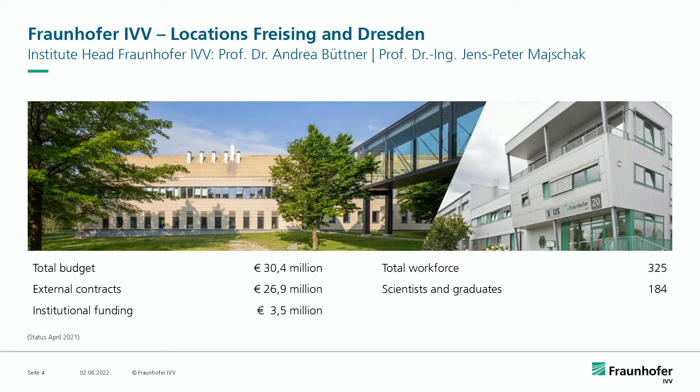We have a budget of 30.4 million euros, and you can see that the large part of that is gained via external contracts, with a small share of public funding. The two locations combined have 325 employees, among whom there are 184 scholars and graduates.

So how do we collaborate with industry? On the one hand, we work together with industry in publicly funded projects through joint research applications, although the industry does its share in the form of funding. Publicly funded projects are usually published, so the results are publicized.

We also have bilateral projects directly with the industry, so you cooperate directly with Fraunhofer Institut. The advantage of that is that the project results are not published, so they remain between the research and the industry in question. So we carry out joint projects with the industry.

So what do we do in Freising and Dresden? Our main area of activity is food, where we look at high quality, the promotion of healthy products and ingredients. Another large field is packaging.

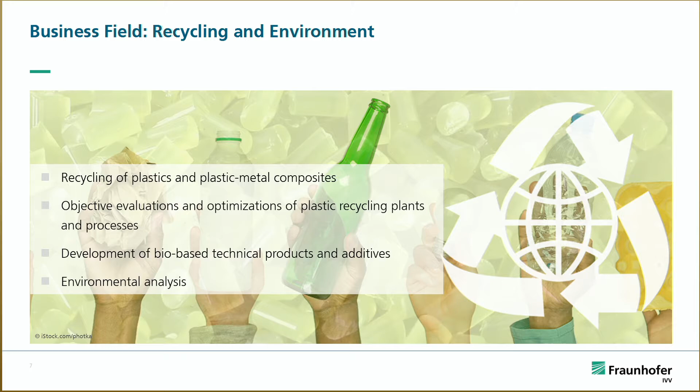We recycle plastics and plastic metal composites. We evaluate plastic recycling plants and processes, and we develop sustainable products and additives. Of course, we also carry out environmental analysis.

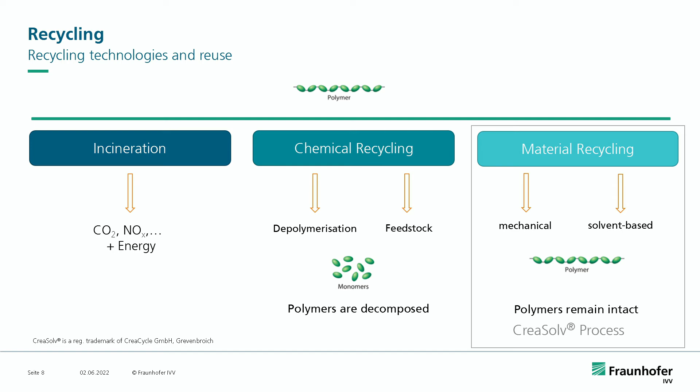I quickly summarized the options you have in recycling technologies and reuse. You can see the intact polymer chain at the top. The difference between recycling technologies is, on the one hand, incineration, which is what we want to avoid. This can restore energy, and there are two methods.

One is chemical recycling, where you break up this long chain, which was painstakingly created, and decompose it. The advantage is that you get the quality of a new product, because it's broken down into monomers, so it can be cleaned very effectively.

The opposite of that is material recycling. This can be done mechanically or thermomechanically, using various sorting techniques and compounding, and recombine it into a polymer chain. Or there's another approach - even though it contains the word 'solvent', it's solvent-based, it is actually also a material process. I'll get back into that later.

So the difference between chemical and material recycling is what I just said: in material recycling, the polymer chain remains intact, and in chemical recycling, it's broken down into monomers.

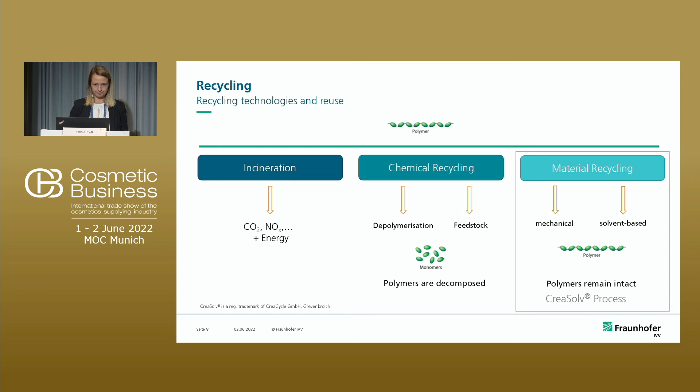So much for the preliminaries. In the recycling business field at the IVV, we deal both with polymers and polymer metal composites. We develop and license solvent-based processes - this is our CreaSolv process.

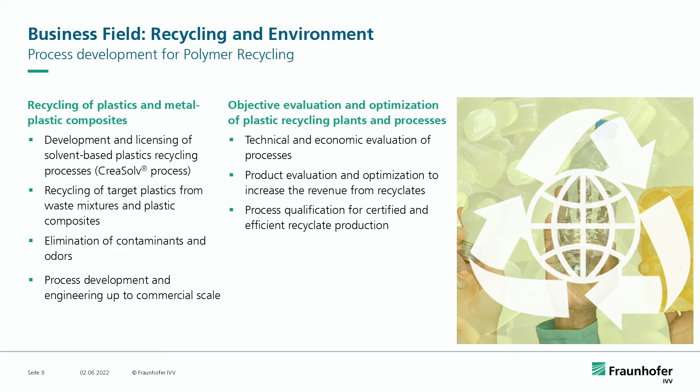Some of you may have heard of it already. We focus the recycling on the target plastics of waste mixtures and plastic composites.

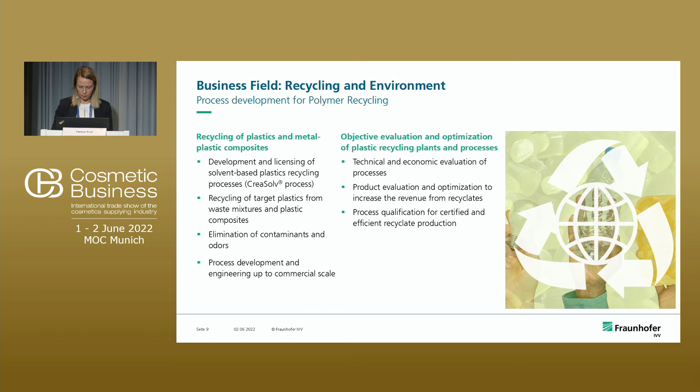So what we focus on is the reduction of contaminants and odors. Moreover, we carry out process development and engineering up to a commercial scale. Something else that we do is technical and economic evaluation of these processes, and we're trying to bring it to market together with the industry.

By now, there are 3 working groups within this department. Back when I started, there were just 6 of us 10 years ago. Now there's 30 of us. So, of course, due to inquiries, we've really grown, and the field of research has grown too.

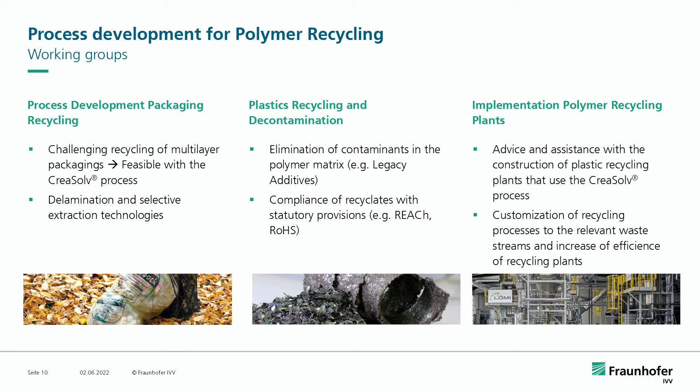I'm group head of the process development packaging recycling. So I'm looking into the recycling of multi-layer packagings within the CreaSolv process, but we also develop further the thermomechanical recycling processes. So we're not just using the CreaSolv process as such, but we also work out techniques for delamination and extraction.

Then there is another group focusing more on technical plastics, and they are looking to extract additives out of the processes. So construction waste would be one example. In the past, there were additives used that are by now prohibited, and we can use our technology to sequester those.

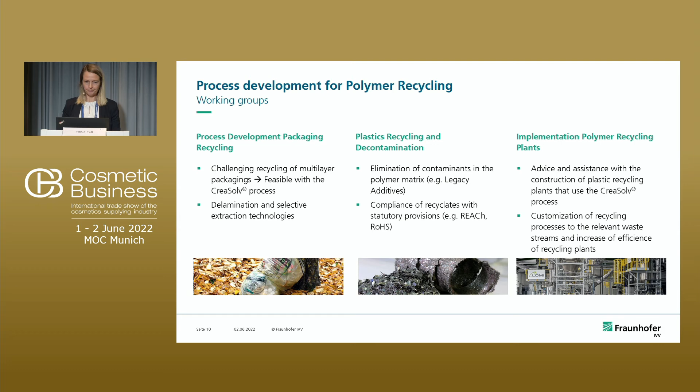Another group is us not just working in the lab, but we're also industrializing our processes. So we're supporting the industry and accompanying this process to the point where it's industry ready and the industry can take over management.

So let's talk about today's topic, which is probably why you're here in the first place: recycling for cosmetic packaging. As an example, I just brought this diagram. This is best practice. This is PET bottles. So we're handling this pretty well.

So for PET bottles, there are collection systems. You all know that. You return your bottles to the supermarket, and then they are cleaned, and this is introduced in a separate cycle, and they can then be reprocessed into new bottles. So this circulation, this cycle, makes sure there are very few contaminants, and it makes it possible that you get an EFSA or FDA petition.

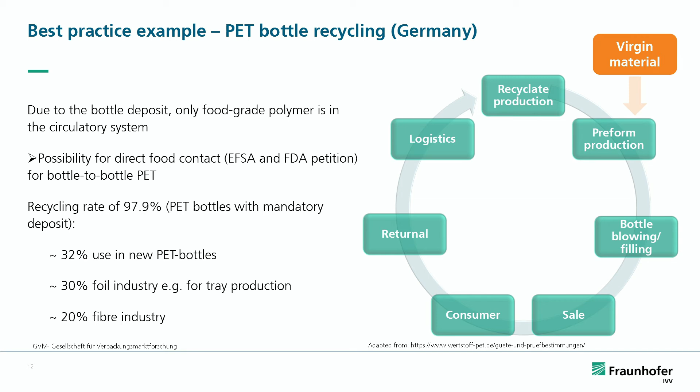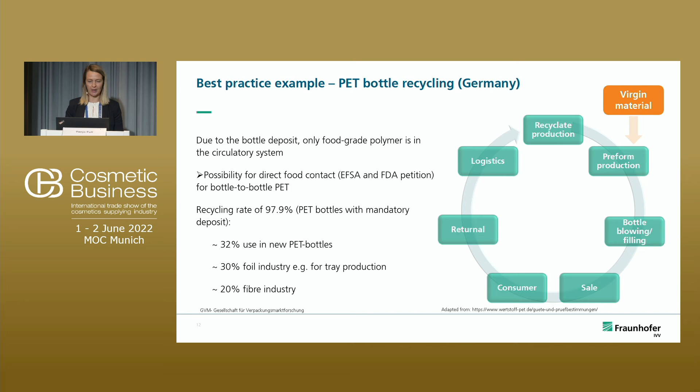So, where do these PET bottles end up? Only 32%, unfortunately, are used to produce new PET bottles. 30% end up in foil or tray production, and 20% end up in the fiber industry. Why do I say unfortunately? Well, actually, it is a pretty good waste stream, and it would be very suitable to close that gap, PET bottle to PET bottle. That would actually be the way to go.

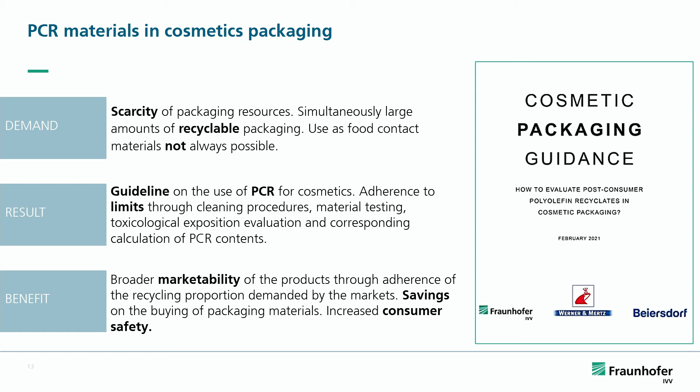Okay, let's get to what I brought you. One of our projects, which we've carried out currently or in the past, is PCR material, post-consumer recycled, whether we can use this in cosmetics products. So the demand is actually always there. We need packaging that does not damage the environment, and ideally they should be food safe. And so we were asking ourselves, what can we do to remarket these?

Dr. Frank Weller, my colleague, you may have heard of him, worked together with Werner & Merz and Beiersdorf to work out a cosmetic packaging guidance, which is a public document. You just need to check the internet and can review the study. So I'll get into more detail on the next slide. But the goal or the benefit was to use this guideline to make it possible to get back to the right way of application. So this is a short overview.

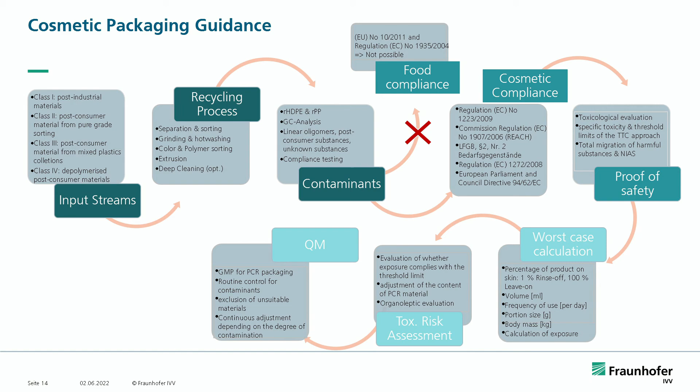So just imagine the yellow bag or the yellow bin, or if you're not from Europe, all packaging waste just bunched together in one big bin. And class 4, that's material which is introduced or is generated via chemical recycling.

So then you have all the possible recycling processes. You have thermomechanical recycling with its various steps. Through all these various packagings, there's a variety of contaminants that may be there. I'll get back to that later to explain the difference in a bit more detail. The fact is that from these materials that I've just mentioned, no food compliance can be generated.

So Mr. Weller got together with industry partners to figure out how to get to a cosmetics guideline. Mr. Weller is usually asked whether he can rate and assess these recyclates, and then he'll play through scenarios which will get him to a conclusion about the safety of the product.

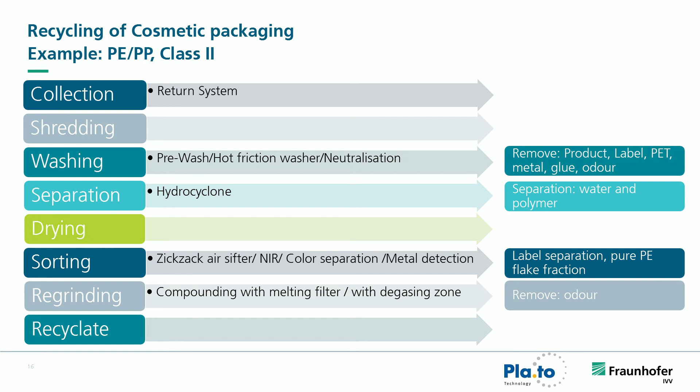So how would we do that? As I just told you, grade 2 means you introduced your internal return system, as was the case with the PET bottles here in Germany, which need to be shredded and washed. Normally you need a pre-wash because product residue may remain in the bottle, and you want to save as much water as possible, so you'd use dry cleaning processes followed by friction washing. The purpose is to remove all labels and glue residue and remove any odors that may have developed. Normally you use a sodium-based detergent, as is also typical for PET bottle recycling processes.

After completing the washing process, you can also recover polyolefins. You can separate that off PET because polyolefins will float on the surface while PET trickles down, so you can do that kind of separation too. To separate water and polymer, you run it through a hydrocyclone before drying it, then through a zigzag air sifter to remove any labels. We use NIR to do additional sorting, for example if you want to separate PP.

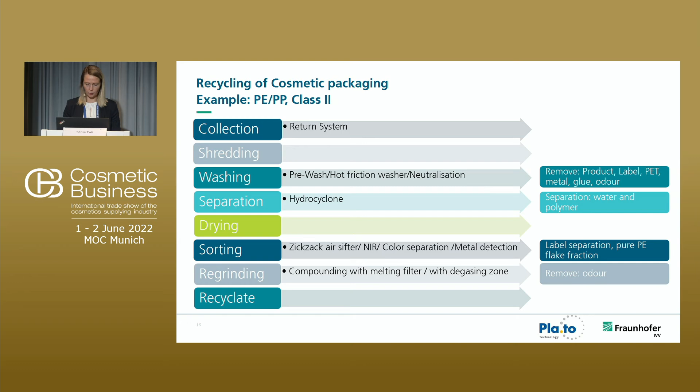Another option is color separation using IR technology and camera systems, followed by a metal detection process, strongly recommended to protect your extrusion facility, which is the last step. After sorting and cleaning all materials, you do compounding with melting filters, and to eliminate other odors you use a degassing zone. After completing this process, you end up with a high quality recyclate, which you can then return into the material circle.

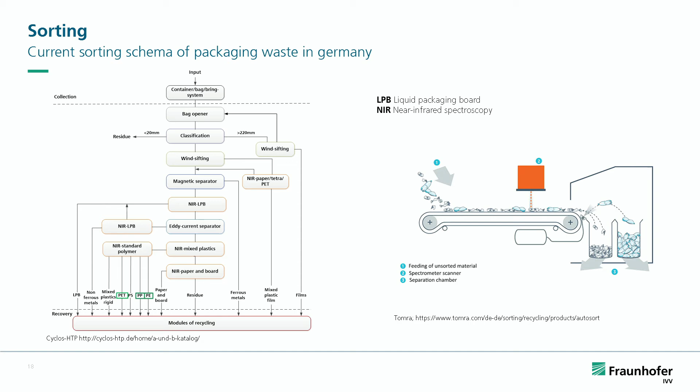After collecting all those recyclables, how can we actually extract our recyclates? Here in Germany, it's a take-and-bring system, meaning consumers collect all their waste materials and either drop it into the yellow bin, the yellow bag, or take it to recycling sites. It depends on where you live, in which region or community, and how they want to do it. You either have to drop it off, or it will be collected from your home and then passed on to a sorting facility.

Once it arrives at the facility, they open up the yellow bags. Next, it's classified as larger than A4 size or smaller than A4 size. Larger films are automatically separated and removed from the rest using the size classification system, then cleaned, then put into the film fraction site — that's the 310 fraction, for those familiar with the principle. Then it's fed back into the loop and run through the classification process again, followed by a windsifting step which helps remove smaller films from rigid materials or other packaging materials.

As you can see, it's like a mixed layer fraction here — mixed plastic films that can either be used as such, or you could also use NIR technology to do additional sorting. Next, you remove LPBs, which run through a magnetic separator. Here we have the first NIR scanner, where we extract different polymers like PET, PS, PP, PE, and all other fractions not recognized during the previous steps of the process.

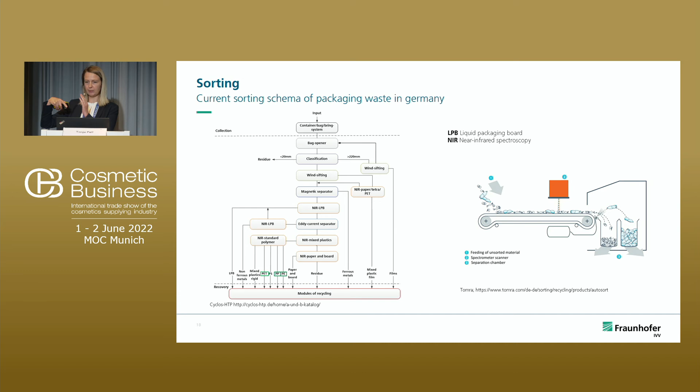You have to separate it very well and spread it out across the belt in order to allow the NIR scanner to really recognize individual components on the conveyor belt. Because if the NIR unit recognizes PE, for example, an airstream will be applied to actually shoot it off to the place where it's supposed to go.

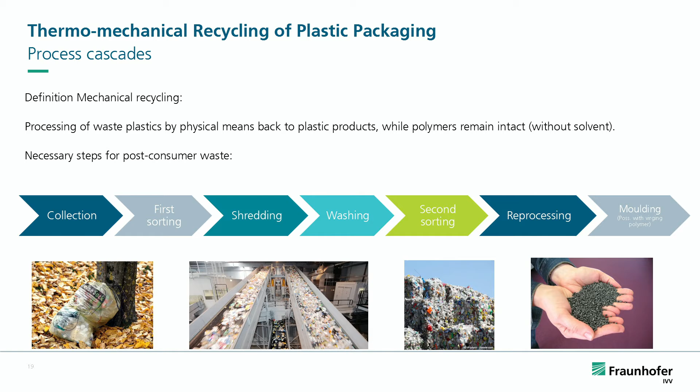Right after our sorting unit, we have a fraction that we can actually work with. As I told you earlier, we'll do shredding, washing. Washing means we just draw it through water, and then you can nicely separate it by materials that swim and those that sink down to the bottom. You can also do additional sorting and end up with some granule of the grade.

So what is the difference between a thermomechanical and a solvent-based recycling process? The difference is the following. We have a waste stream coming in, and here we would only use mixed waste because it wouldn't make sense to separate by fractions for this particular process.

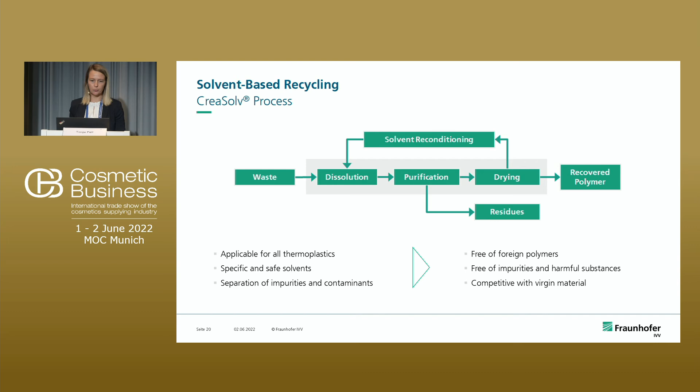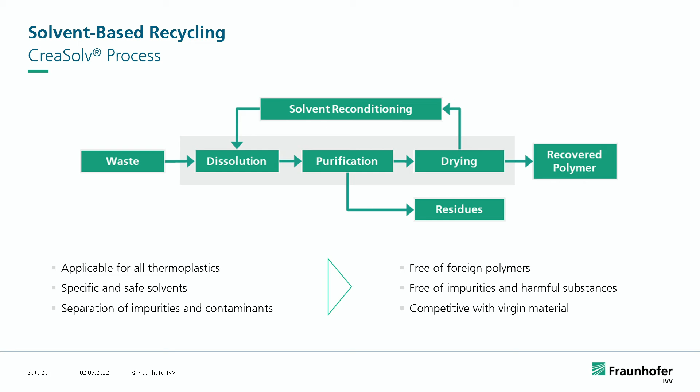At the end, the polymer that we recovered, in that case PE, we have to remove the solvent. We do what we call a solvent reconditioning process in order to feed the solvent back into the loop. At the end, our result is a pure polymer. This is suitable for all kinds of thermoplastic materials. We apply specific safe solvents, so we can actually remove all contaminants. We have a very pure granule at the very end, which is pretty close to virgin material.

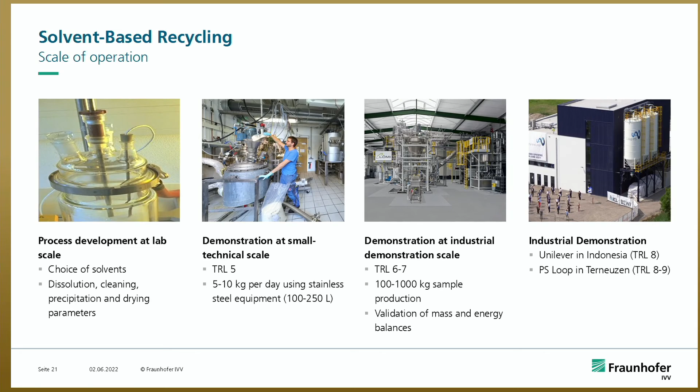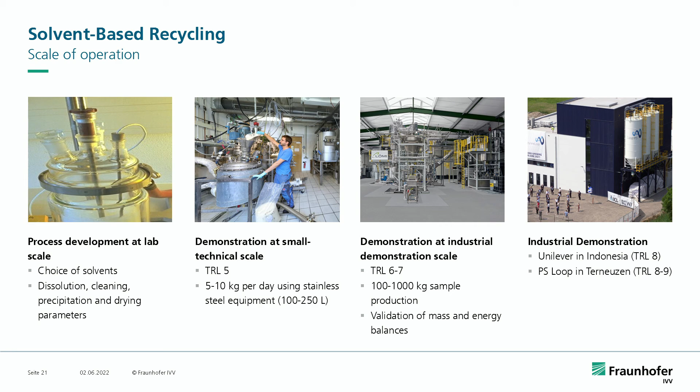We now have a demonstration facility at demonstration scale where we can actually produce 100 to 1,000 kilos. This unit allows us to derive valid data for commercial scale production and for mass and energy balances. So we've now reached industrial scale, but it's just a demonstration project.

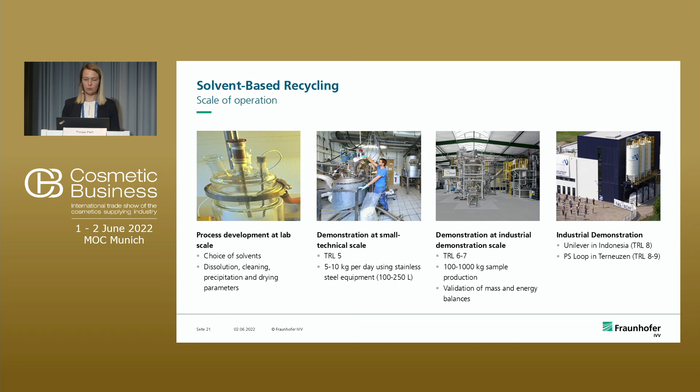We have one unit in Indonesia, TRL8. It's a Unilever unit, so this unit has daily production. We also have a unit in the Netherlands, in Europe, in Terneuzen, where we do polystyrene recycling. We successfully built up that unit, and this is currently about to pick up real production. Our purpose there was to use construction material to actually turn it and recover insulation materials. The Unilever unit wants to separate and recycle mixed waste to recover film that can then be used in the packaging industry. So what is the capacity of this process?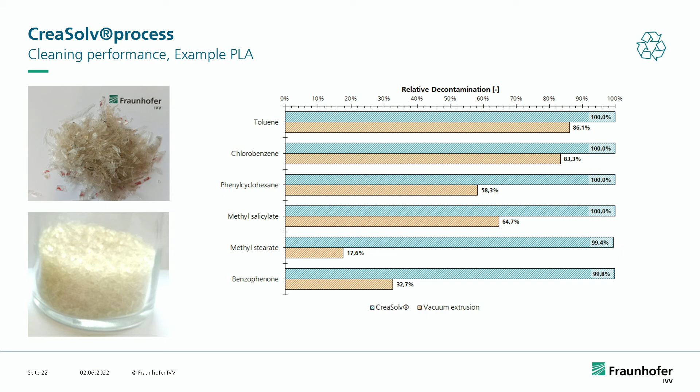Let me explain about the cleaning performance. PLA, polylactide: the starting material is a waste stream that includes paper, dirt, and PLA. So we tested the purification, the cleaning performance we needed. For those of you familiar with that, we run a challenge test. You expose this material to a certain substance listed here, toluene, chlorobenzene, methyl salicylate, etc., and we would actually check the process cascade to check cleaning performance.

You can see a comparison of CreaSolv versus normal thermomechanical recycling. As you can see, our performance was very good, below the threshold. Here, for example, we have to do further calculations to see whether those substances could possibly interfere with the field of application intended. But there is a significant difference compared to thermomechanical recycling, where cleaning performance was not as good. These kinds of challenge tests are also run for PET, for example, in order to assess the cleaning performance within the recycling process.

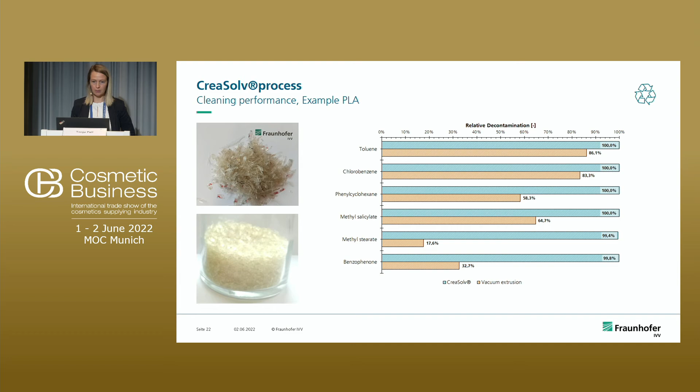So what other projects did we run in the past? Multicycle is another project example. This was about the recycling of multi-layer packages, and fibers in the automotive industry. Our result was that the project ended this May. Our grades for PE, PP, PA, and PET were of significantly high quality. We have a unit located here in Bavaria, in Germany.

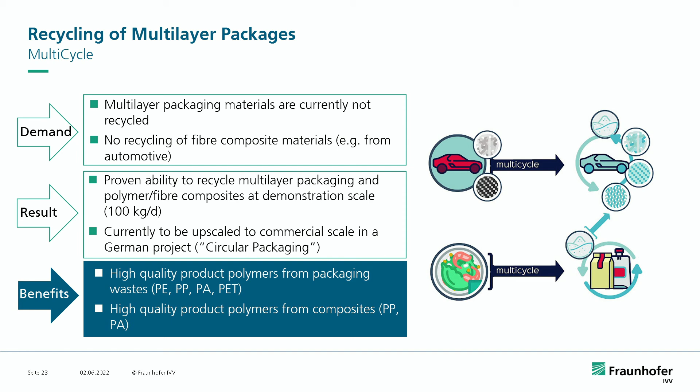We had great PP and PA composites from automotive. The recyclates that we produced during that project came from Amcor, the company that was our partner in that project.

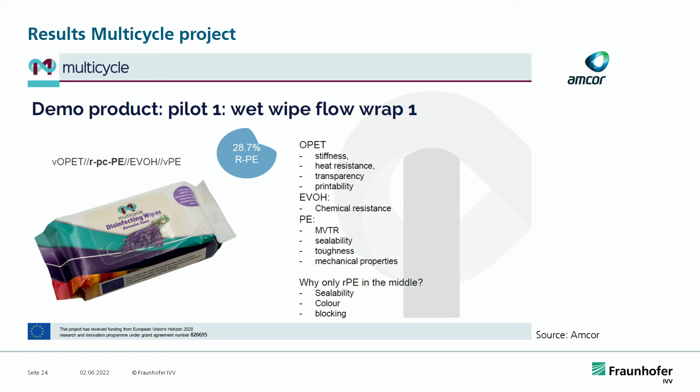It was an EU project. They produced new films and built demonstrators to illustrate how the recyclate can be used in a composite material, and what properties the material can have when using recyclate.

I think that is a perfect illustration of a product that can be produced from a recyclate - that's the film used for a new product.

And the RPE share was somewhere in the middle here. Here we had EVOH, and here we had PP plus recyclate.

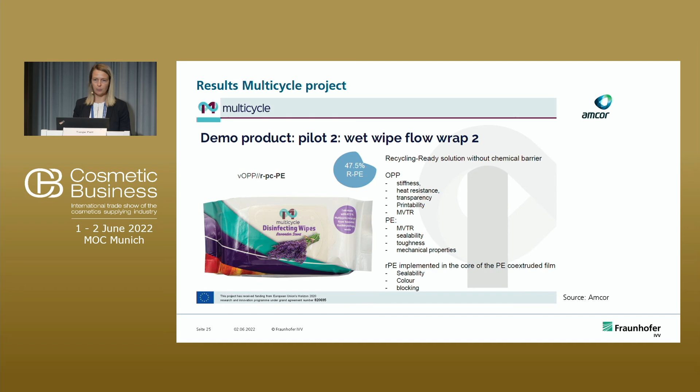And here another product - this was also a demonstration product where we tried to use the film, or to use the recyclate, to produce sachets. We use PP and metallized OPP.

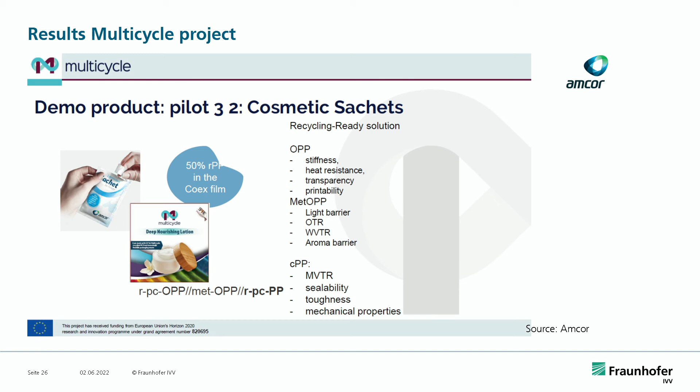No, we didn't test whether or not this is a product that we could reintroduce into the market, because this was not the aim of the project. The aim of the project was to determine what is feasible, what can we actually do.

And of course we would want to try to reintroduce that into the loop, so that will be the next stages of that project. We have the circular food pack project, for example, where we try to achieve a great stream of materials.

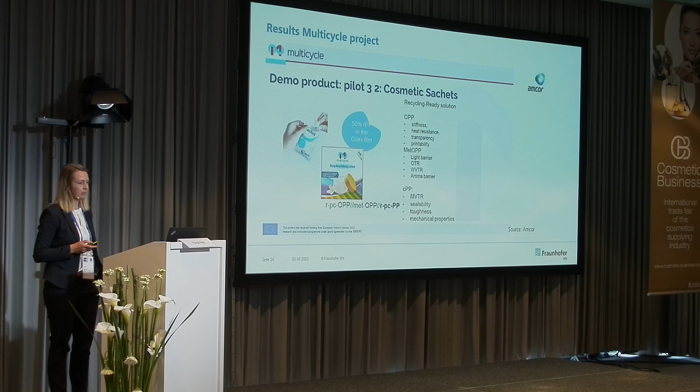So we try to collect food packages and actually recycle them, and produce food packaging from that recyclate.

Let me summarize the benefits of the CreaSolv process. This is the solvent-based process. We don't need high sorting rates.

We are selective with regard to the rest of the waste materials. If you want PE, we won't have any other plastic materials mixed in, so the cleaning performance is excellent.

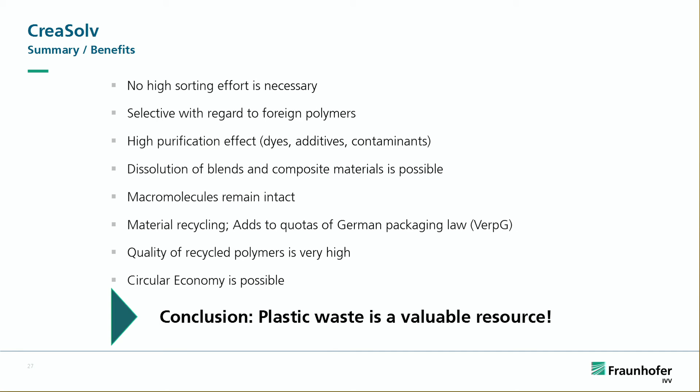We can also actually purify dyes, additives, and contaminants, and remove that from the material. With the color, it depends of course - if we only have black packagings, we don't get transparent recyclate out of that, obviously.

But we can dissolve blends and composite materials. The molecules remain intact, as I explained to you at the very beginning.

So this type of material recycling allows us to add our quotas, which means we have a large stream of mixed waste, which is hard to reintroduce into the loop in the first place. So this technology allows us to provide significant value added.

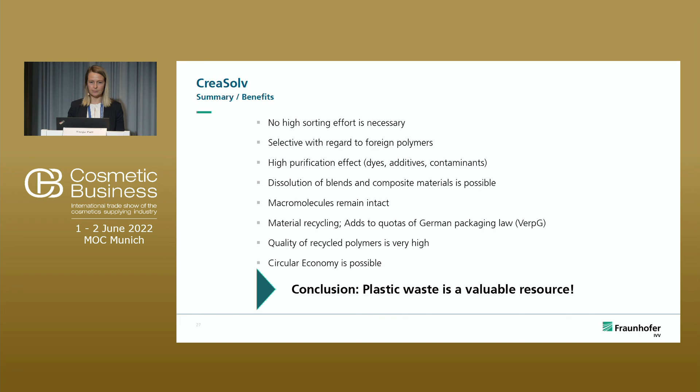And at the end we'll end up with a very high quality of our recycled polymers. So it's possible to close that loop and achieve circularity.

For three years now, we have cooperated with other Fraunhofer partners, in fields including material, system, and business.

Our goal of that cooperation is to develop new plastic materials that are not oil-based, to make them recyclable, and to make them biodegradable. So we work on new elastomers as well.

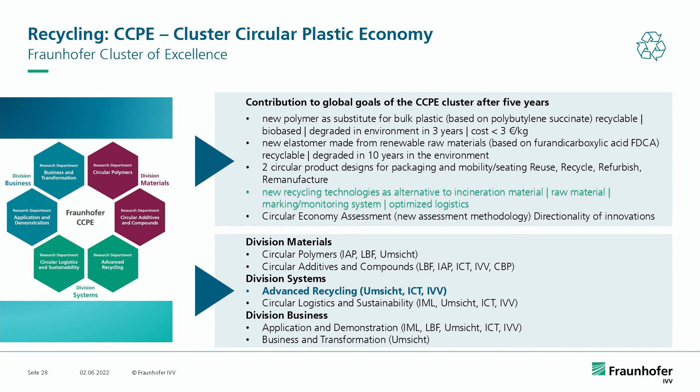And we want to achieve design for recycling for various product groups. So we're currently developing new recycling technologies to offer alternative solutions.

IVV, our institute, is involved in that recycling effort. So we work with ICT, the institute, in order to do research on chemical recycling, thermomechanical recycling, and solvent-based recycling processes.

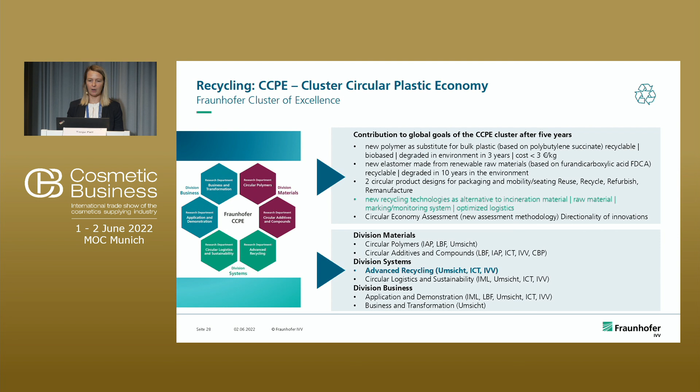And we also take a closer look at mixed waste streams, because we want to cleverly combine all technologies in order to seize all opportunities and also make it economically feasible to use all those technologies.

So we do not only do recycling technologies - what other services do we offer for the cosmetics industry? We work on product perception, product optimization, packaging, and hygiene in production.

So what services do we offer in the packaging sector? We develop new packaging systems that can be recycled.

We try to use bio-based resources, and we actually want to achieve conformity of our packagings, or test conformity of the packagings.

Mr. Welle, my colleague, is responsible for that sector. We offer workshops for companies, internal workshops regarding recyclability, use of recyclates.

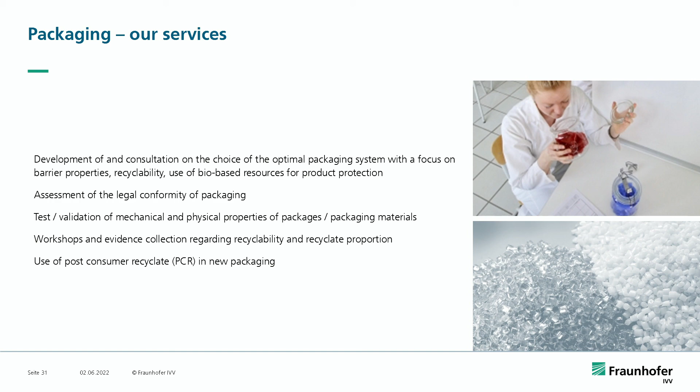Recyclability analysis, and we try to use post-consumer recyclates in new packaging concepts.